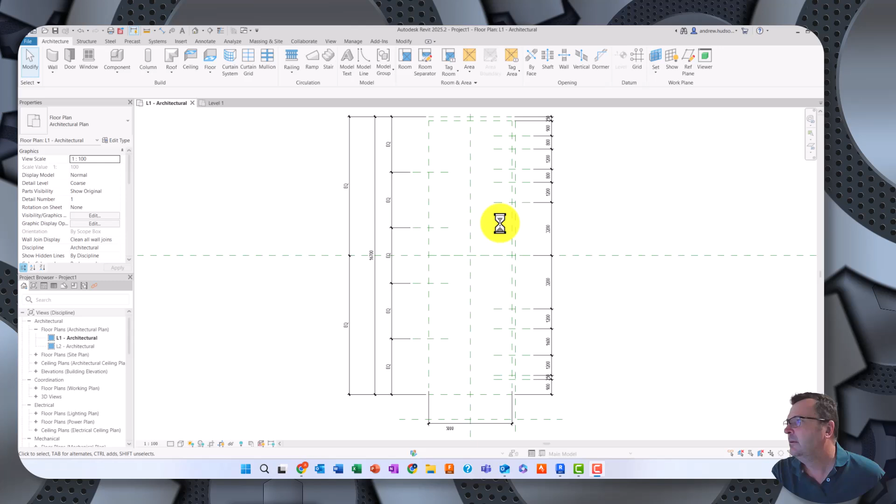Here we've got our Revit file open, and we've got our work planes there. I have added an extra plane down the side here. This plane here, if I click on it, it is 250 millimeters away from the other one. The other thing we have done is called this chain, because we're going to put a chain for support on this particular reference plane later on. So I did add that one in.

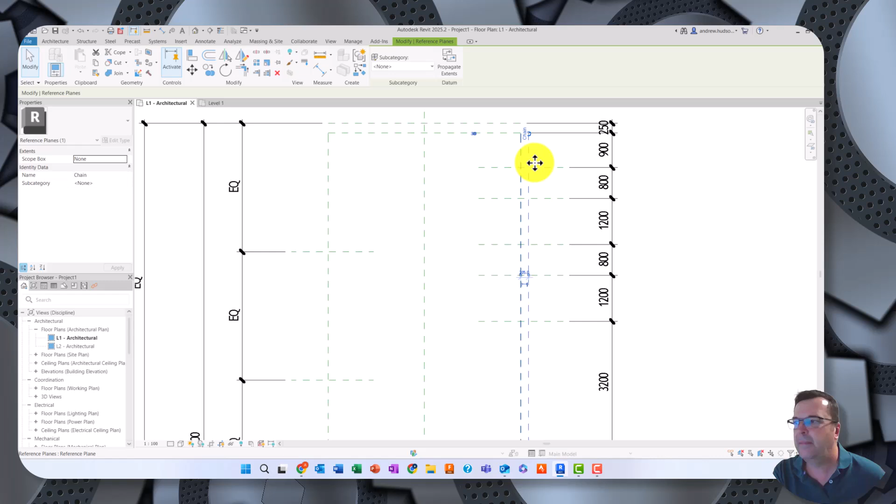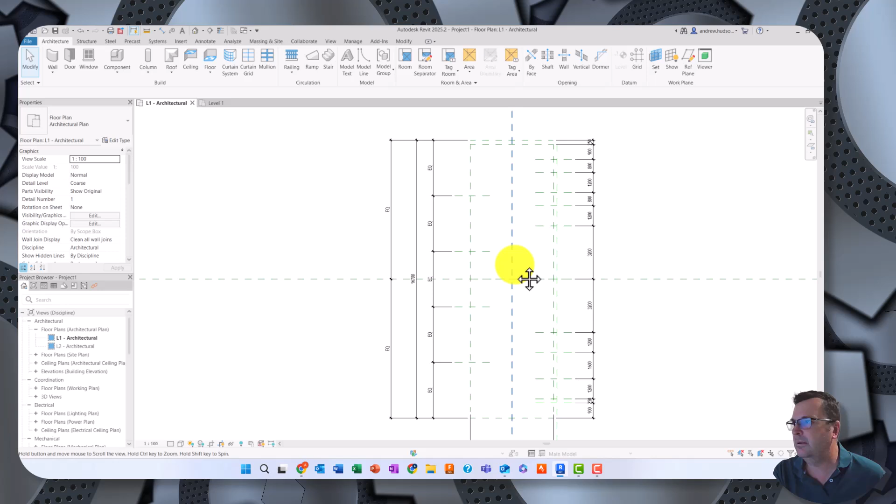That's the only one I think that is named all up, so we should have something like that. The only other thing I did was bring these lines out a little bit, just to separate them off and try to clear things up. To do that, all you need to do is click on it and drag the circles backwards and forwards and line them up however you want, just to neaten them up. So that's what I've got it looking like at the moment.

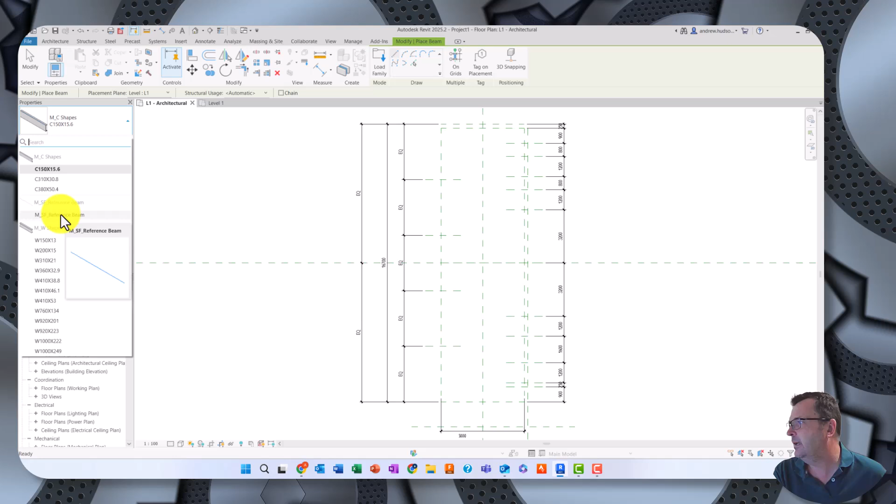So our next step is to put some beams in here, and you're going to have to try and find these, and then we're going to have to create some custom sizes for them. So if we go to structure, go to beam, what we're looking for is called a Glulam beam, and essentially it is layers of timber glued together to form a bigger beam.

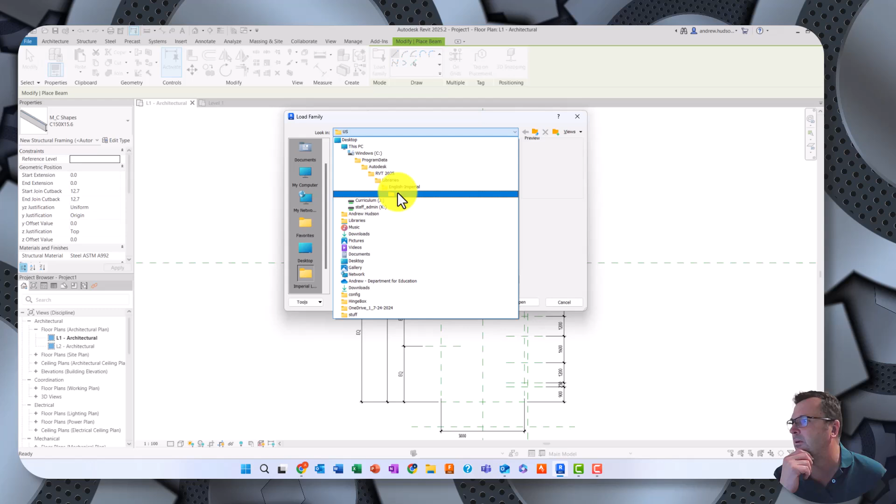So what we're going to do is load the family, and in our families window, just bring that across. Mine's gone to the US Imperial - I'm not sure how to change it by default, I'll have to look at that in a sec. But essentially, go back to your libraries. You can go to English by the metric one. I think it's in both the Australian and the US one.

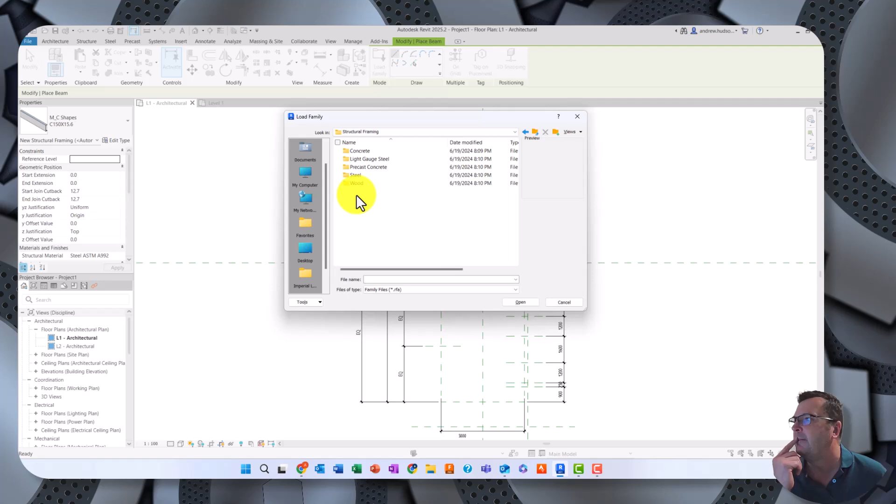If you go into that, scroll down till you find structural framing, I think is the one that we want. Then go to wood, and you've got Glulam Southern Pine. Click on that and go open, and it will bring up a default size of 76 millimeters by 140. Then we've got another size there of 127 by 279.

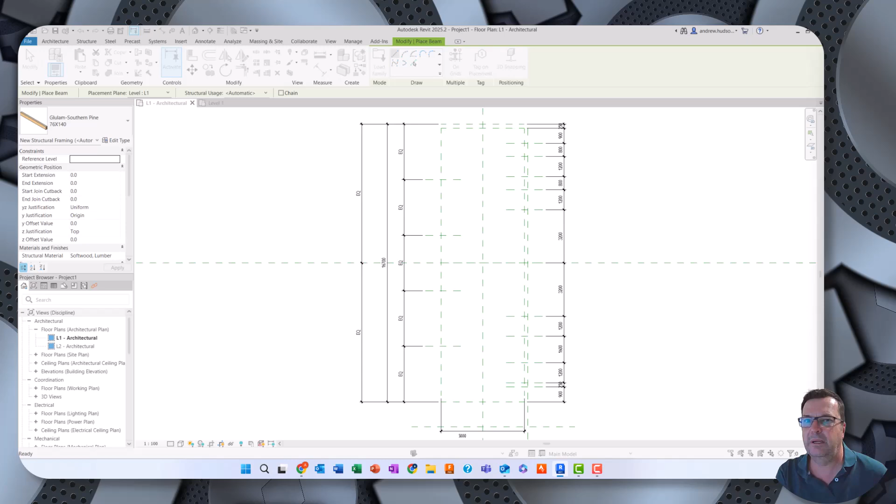So we're going to have to create some custom sizes for what we want. What we're going to do is pick that top one, go to edit type, which will bring up this window here. In here, the first step is to go duplicate, and it'll come up with the same title as that one, but with the 2 next to it. Just go OK, then once it's done that, we can rename that.

So this time we're going to rename this to be 200 by 350. Now, how they've written there, they've got no spaces between these, so let's just bring that back like that. So we're going to go OK, and then what we need to do is change these two dimensions here. In this one here, we need that to be 200, and in this one here, we need that to be 350. Go OK, and so now we have that size over there of 200 by 350.

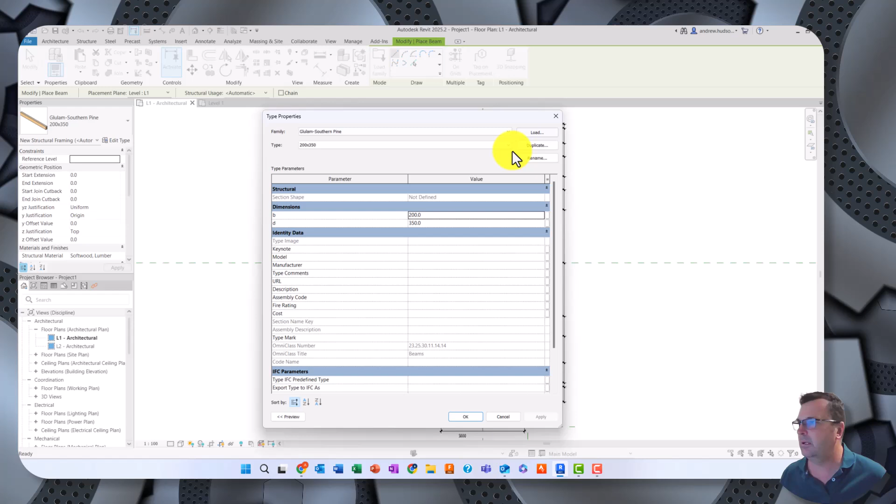So that should add that to what we've got there. We're just going to go edit type one more time. We've got two other sizes that we're going to do, so we'll continue with all of those. We're going to duplicate that again, go over that, rename, and this time we want this to be 200 by 200. So I'm just going to go in here and change that to 200, go OK, change this to 200, and go apply.

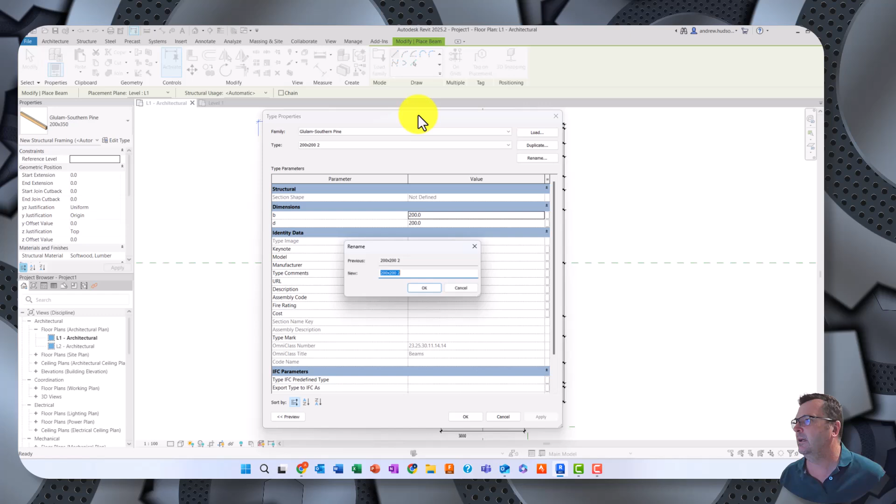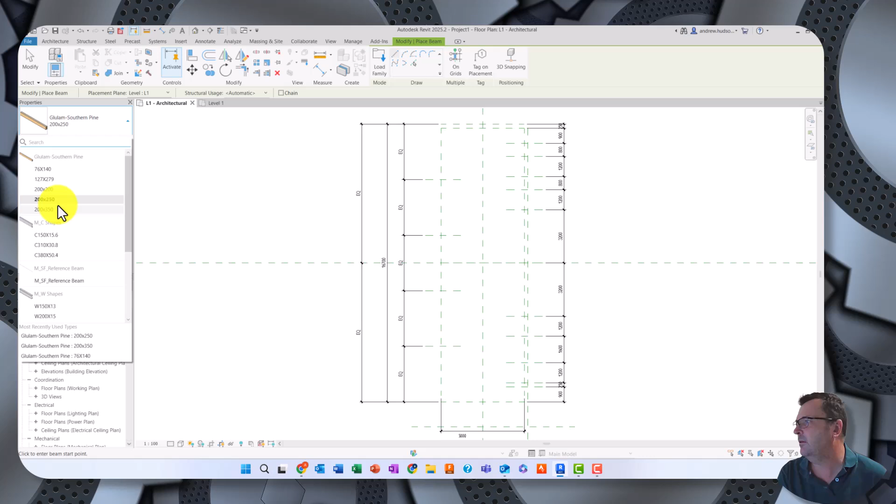And then we're going to duplicate that again, rename that again, and our last one is going to be 200 by 250, and change that to 250, and go apply. Okay, so now in our family up there we should have 5 different sizes of those things, the 3 that we just custom made and the 2 that we've got there before that.

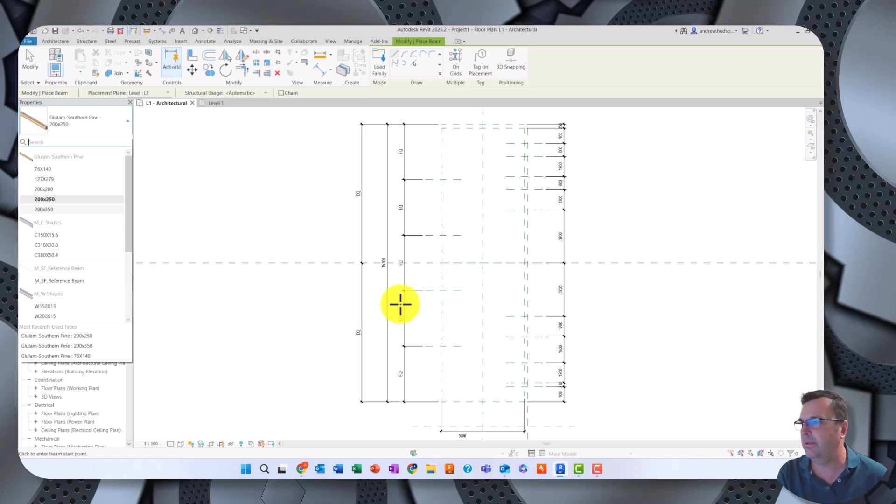So your next step is to put all those size beams in there, do all that, and then what we're going to do is lay those beams out within the floor structure that we've got going on so far. So set those last few reference planes up. Once you've got all that done, go into there, find the Glulam, and set your custom sizes for that, and then we'll go to the next video and put those beams actually in the building. Cheers.